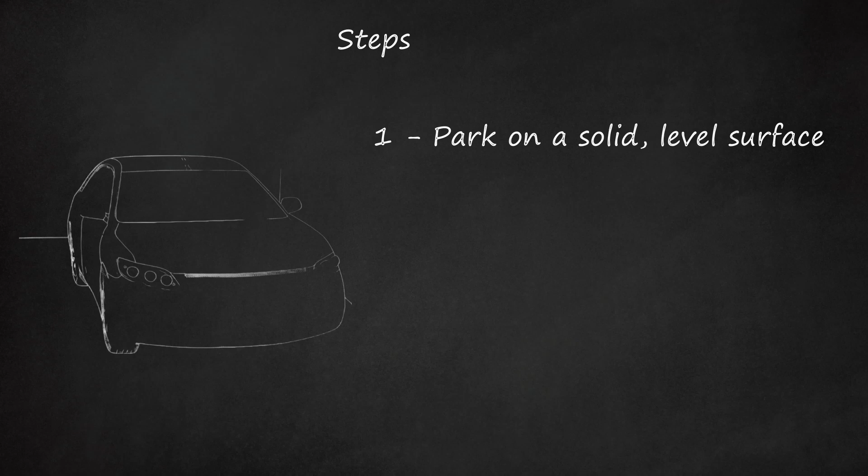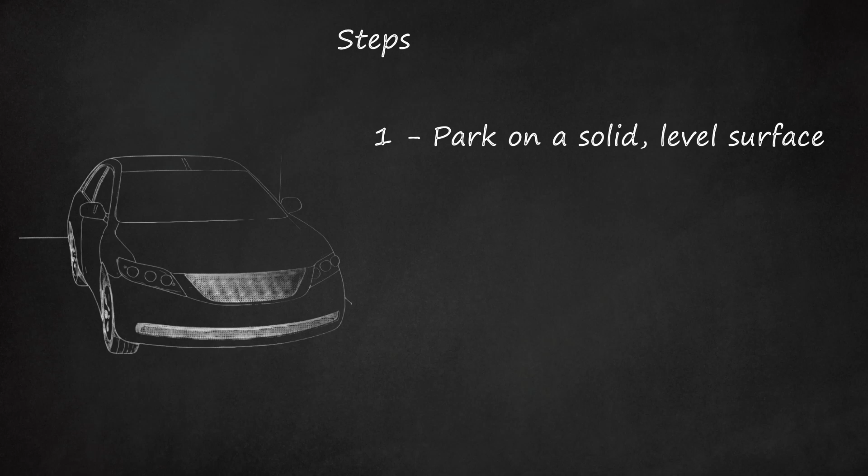1. Park on a solid, level surface. Concrete is best, as jacks and jack stands can sink into asphalt on hot summer days. This affects the stability of the vehicle and damages the asphalt surface. Work in a shady spot out of direct sun. It will probably take a few hours to do both sides of one axle if it is the first time doing this work, so plan accordingly.

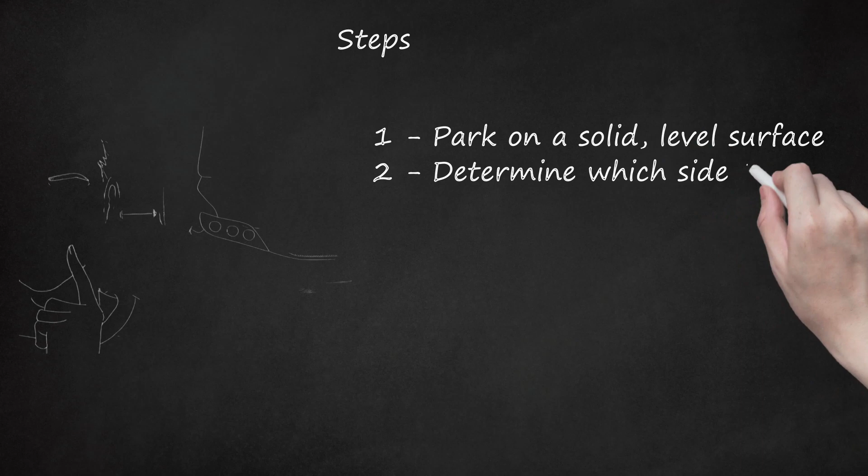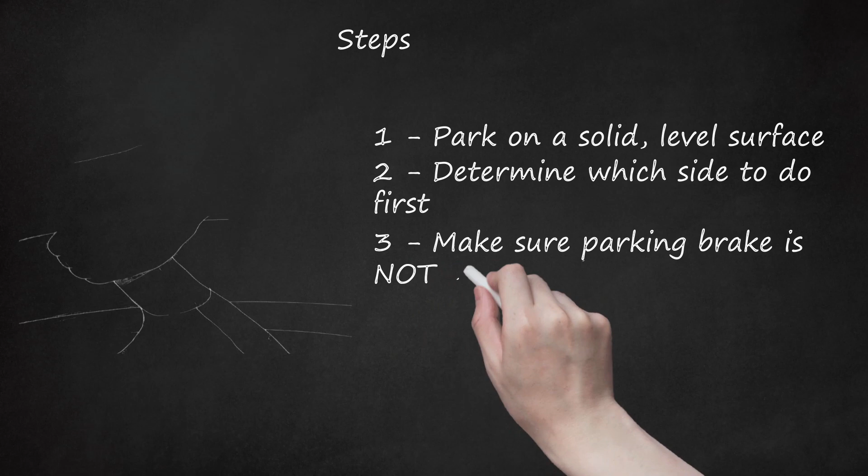2. Determine which side to do first. Assume the driver's side will be worked on first for this wiki. 3. Make sure parking brake is not engaged if working on the rear calipers. 4. Chock the wheels on the passenger side of the vehicle. Place one chock block ahead of the front tire and a second behind the rear tire to prevent the vehicle from rolling in either direction.

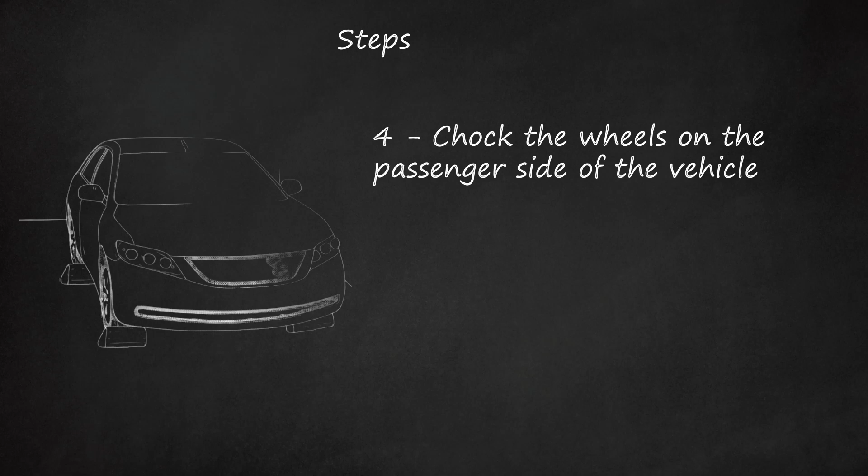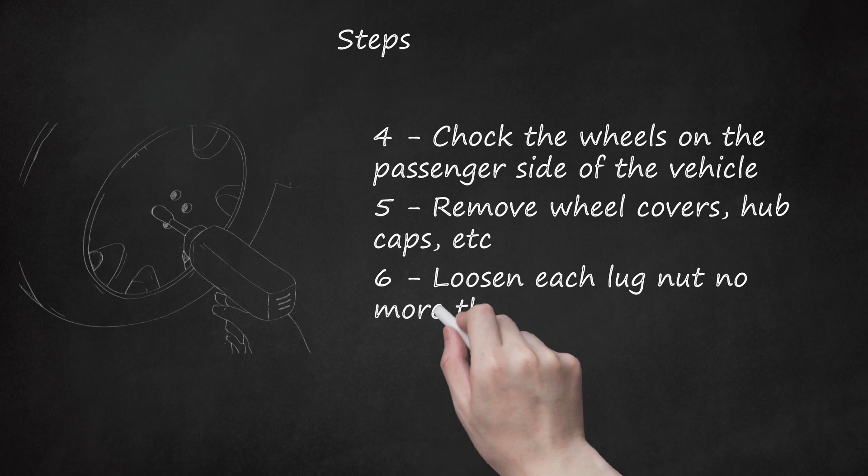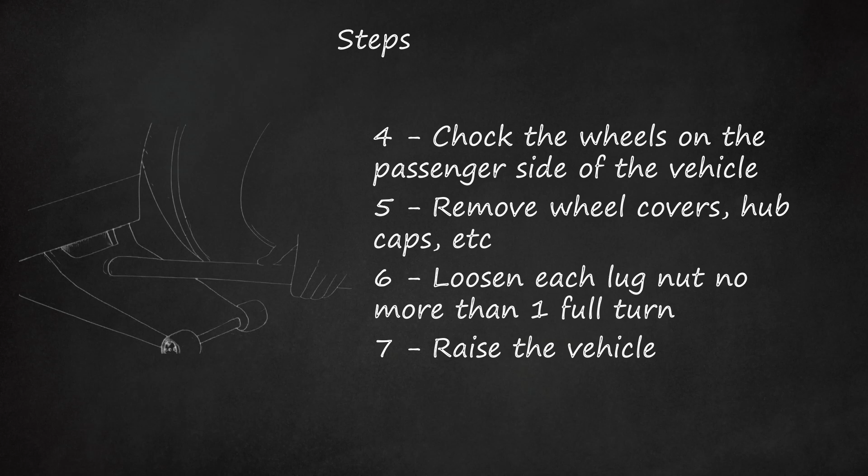5. Remove wheel covers, hubcaps, etc. to allow access to the lug nuts. 6. Loosen each lug nut no more than one full turn. 7. Raise the vehicle. Use the manufacturer's supplied jack or use a floor jack to raise the vehicle, and lift only at the manufacturer's designated points on the vehicle.

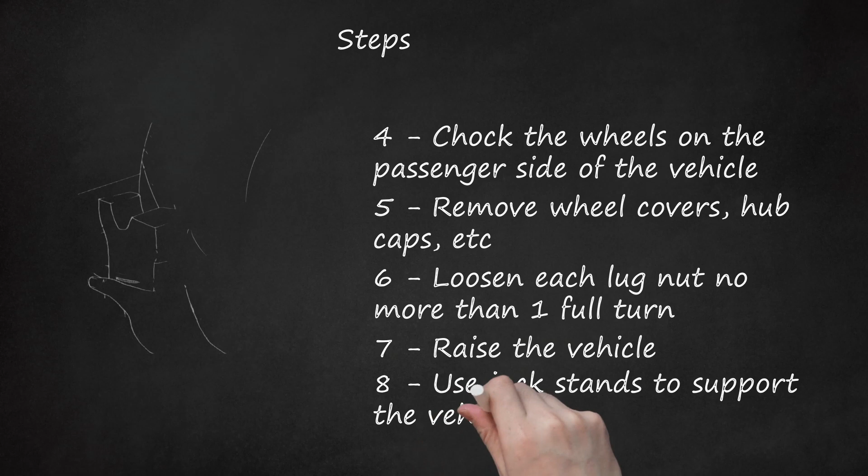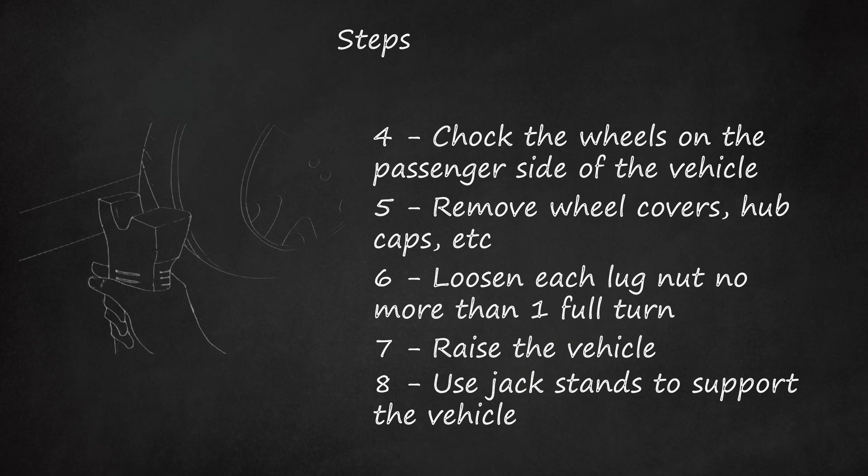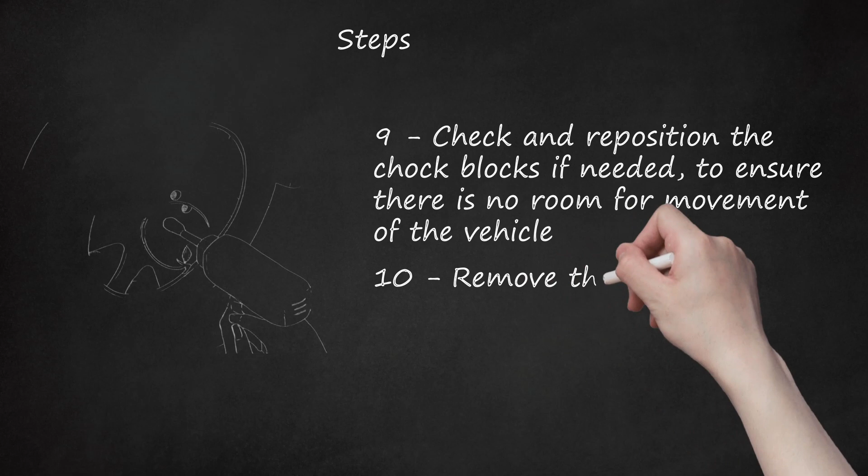8. Use jack stands to support the vehicle. Do not attempt to work on any vehicle supported only by a jack. If supporting the vehicle at the axle, do so closest to the wheels. Do not support or lift the axle solely at the differential. 9. Check and reposition the chock blocks if needed to ensure there is no room for movement of the vehicle. 10. Remove the lug nuts and place in hubcap. 11. Remove wheel and tire assembly.

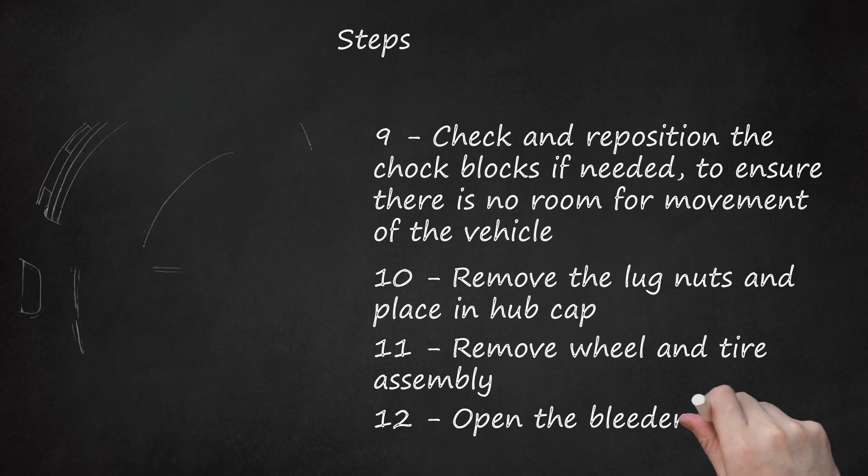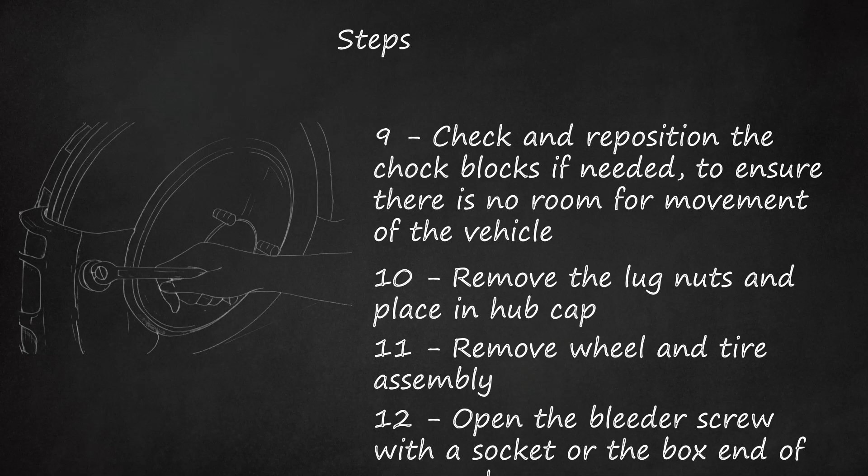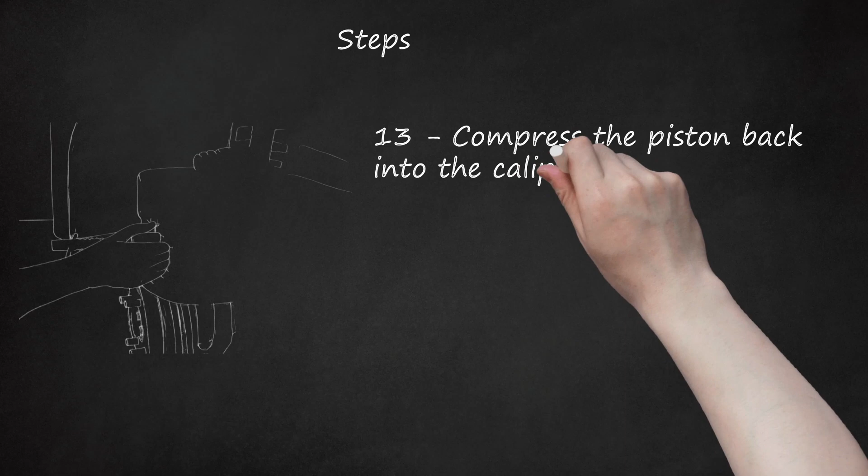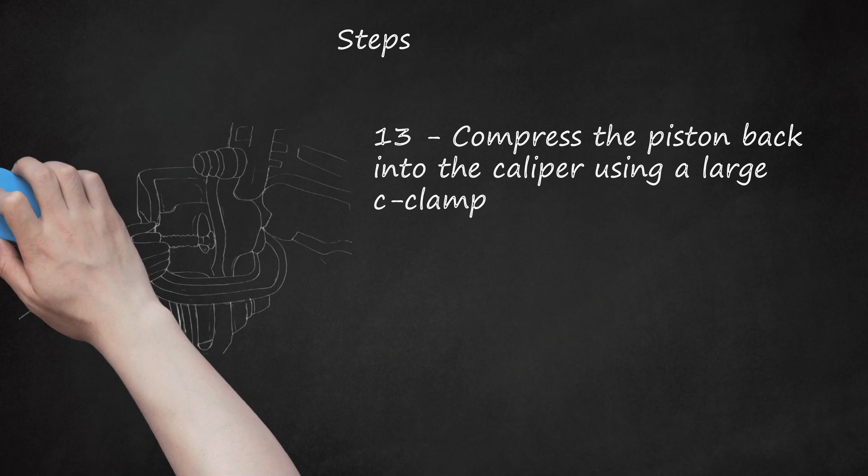12. Open the bleeder screw with a socket or the box end of a wrench. Note, these are made of soft metal and are easily damaged. Slip a length of snug-fitting clear hose over the screw to direct fluid into a container on the ground. 13. Compress the piston back into the caliper using a large C-clamp. Do this until the pads are no longer pressed firmly against the rotor. Expect brake fluid to be expelled from the bleeder screw as the piston is forced into the caliper.

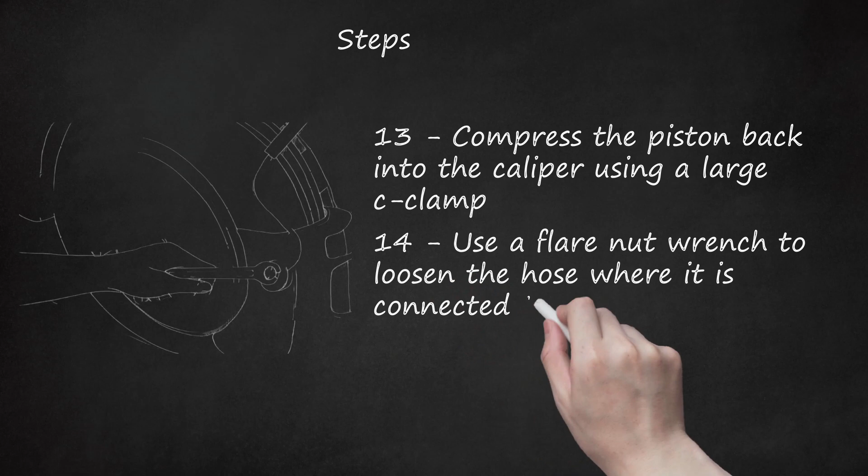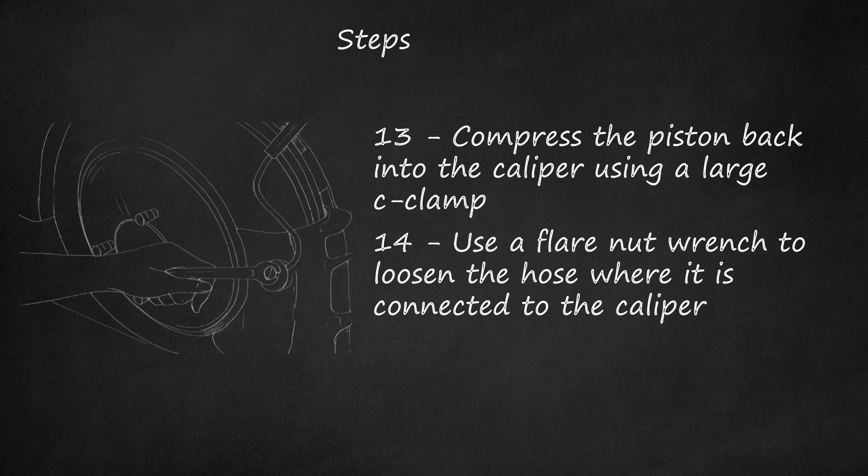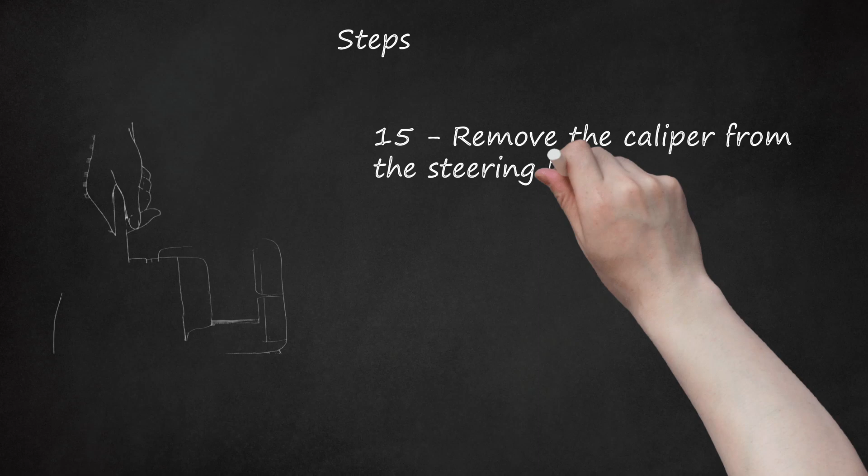14. Use a flare nut wrench to loosen the hose where it is connected to the caliper. Do not turn hose more than half a turn to avoid kinking the hose. On some vehicles a banjo bolt secures the hose to the caliper, in which case the hose can be removed in this step, and step 16 may be omitted. 15. Remove the caliper from the steering knuckle using wrenches or hex sockets as required. On rear disc brakes, the parking brake is removed from the caliper and the procedure varies from vehicle to vehicle. It will not be possible to remove the rear caliper if the parking brake is engaged.

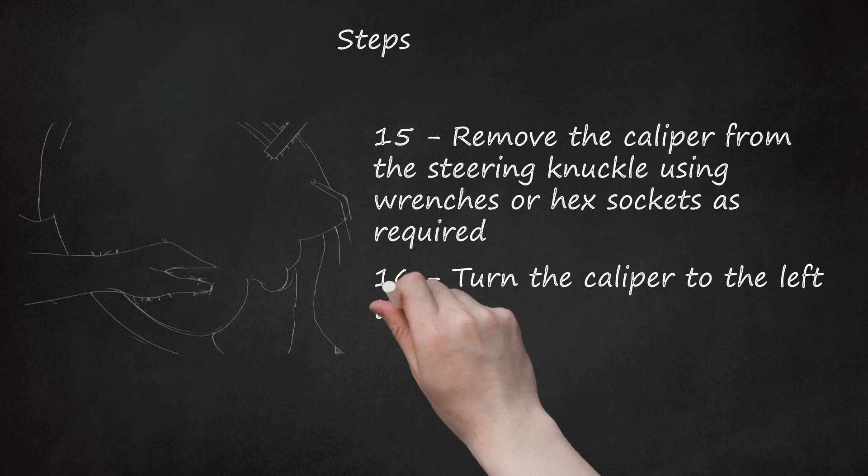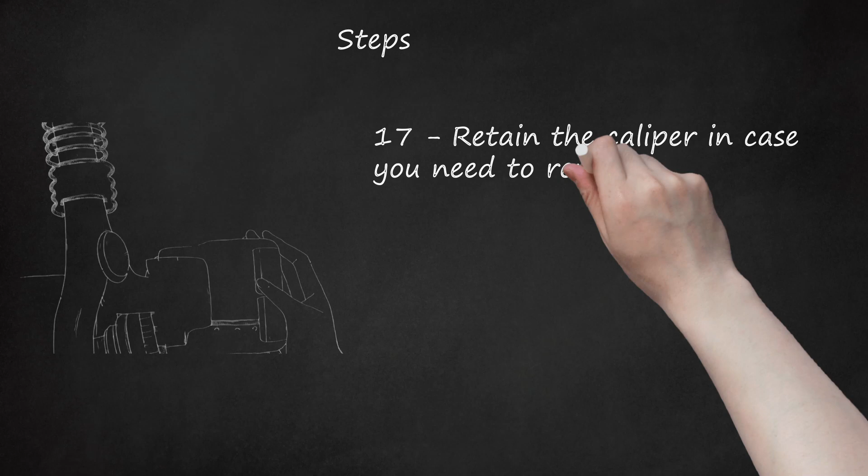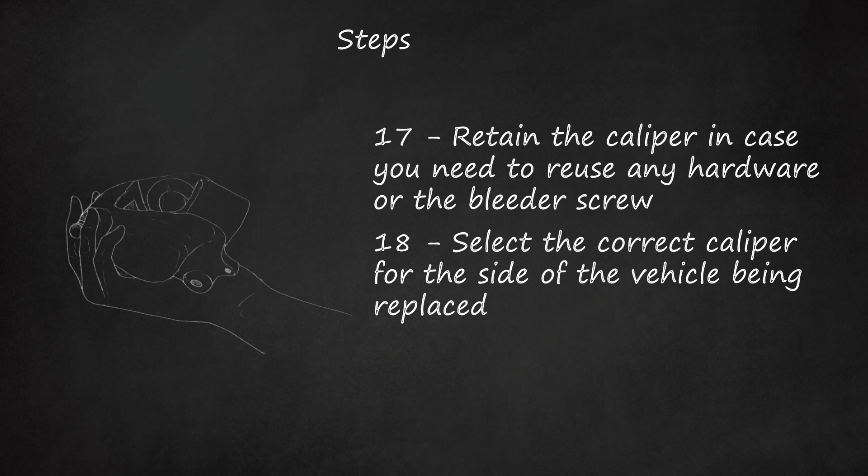16. Turn the caliper to the left to unscrew it from the brake hose after the caliper is free from the steering knuckle. 17. Retain the caliper in case you need to reuse any hardware or the bleeder screw. 18. Select the correct caliper for the side of the vehicle being replaced. The correct caliper will have the bleeder nut oriented at the top, or very close to the top, after being installed on the vehicle. Failure to install the correct caliper will trap air in the system. This will cause a spongy-feeling brake pedal and possibly brake failure. Hold both calipers near the rotor, oriented as they would be installed on the vehicle, and install only the caliper that has the bleeder nut at the top.

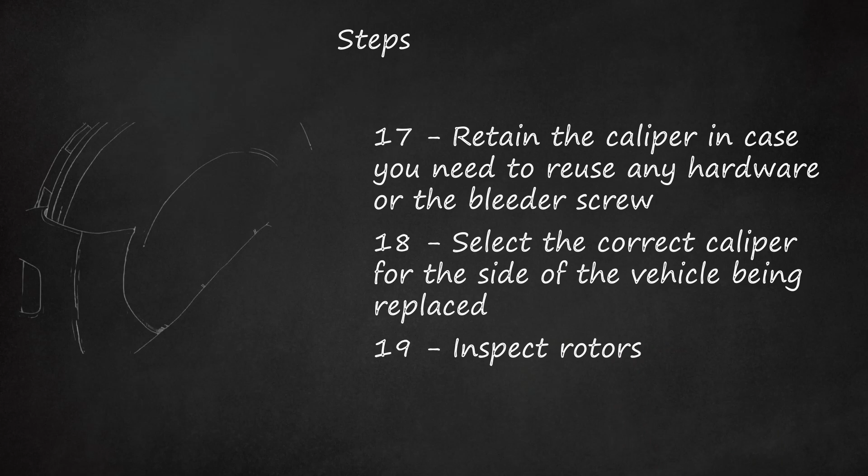19. Inspect rotors. The bulk of this brake work is the caliper and pad removal and replacement. Not servicing the rotors, while accessible now, is practically negligent. Consider removing the rotor for machining, called turning on a lathe, to remove glazing, gouges, and grooves. Well-traveled rotors are often glazed and result in extended stopping distances.

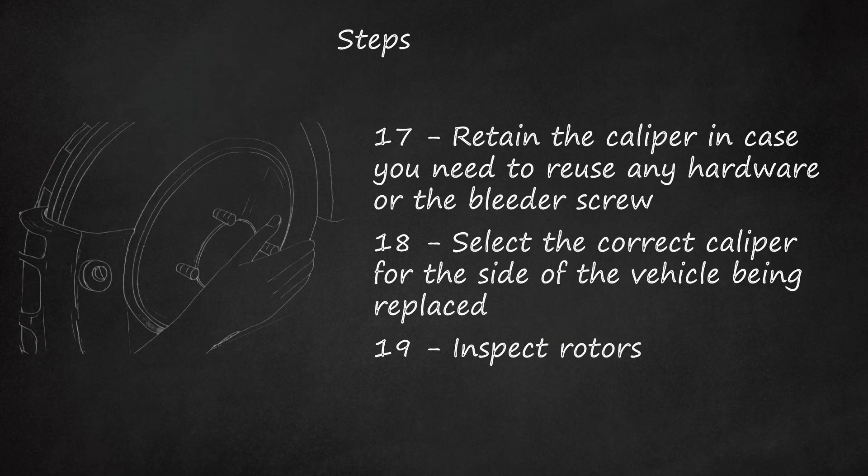If the rotor is too worn or has deep grooves or has significant rust, replacement may be required. Oftentimes replacing with new rotors for $25 or so is better than machining old rotors for $15. Actual cost of machining or replacement rotors is dependent on vehicle type, supply house pricing, etc., and is a matter of personal choice. Many full-service auto supply shops offer rotor machining. It is illegal, however, to machine rotors that are too thin or otherwise unsafe for installation on the vehicle.

20. Fully compress the piston and install the new brake pads into the caliper. This step is not needed if a C-clamp was used during caliper removal. 21. Attach the brake hose to the caliper, making sure to use the new copper washers that came with the new caliper, and fit the assembly over the rotor.

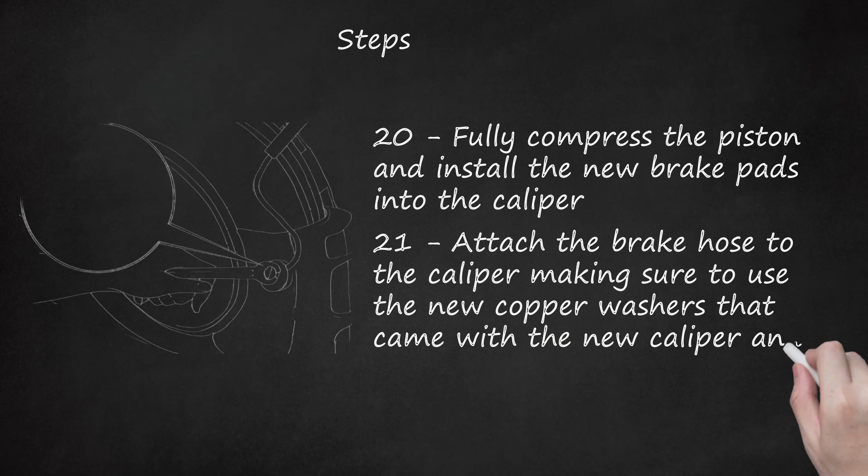22. Secure the caliper to the steering knuckle in reverse order of the removal steps above. 23. Finish tightening the hose to the caliper if not done already, being careful not to over-tighten it. 24. Install the bleeder screw loosely. Slip clear hose over the screw to direct fluid into a container on the ground. Release the hose clamping pliers or vice grips.

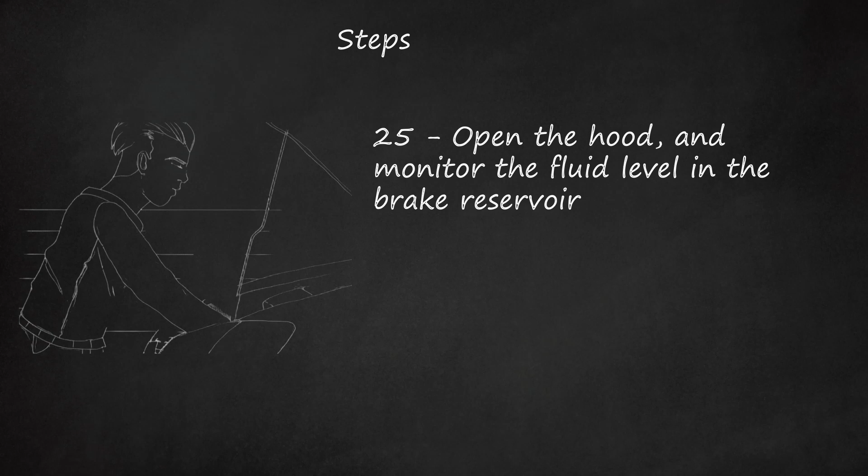25. Open the hood and monitor the fluid level in the brake reservoir. Add additional fluid to maintain the level above minimum. 26. Have a helper compress the brake pedal and hold it to the floor. Tighten bleeder. Have helper pump brakes 3 times and hold. Release bleeder valve to drain air and tighten. Repeat process until no air is found.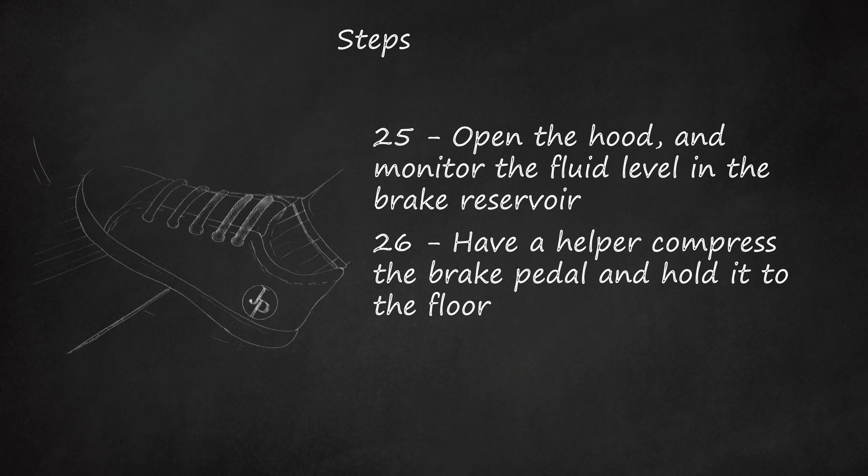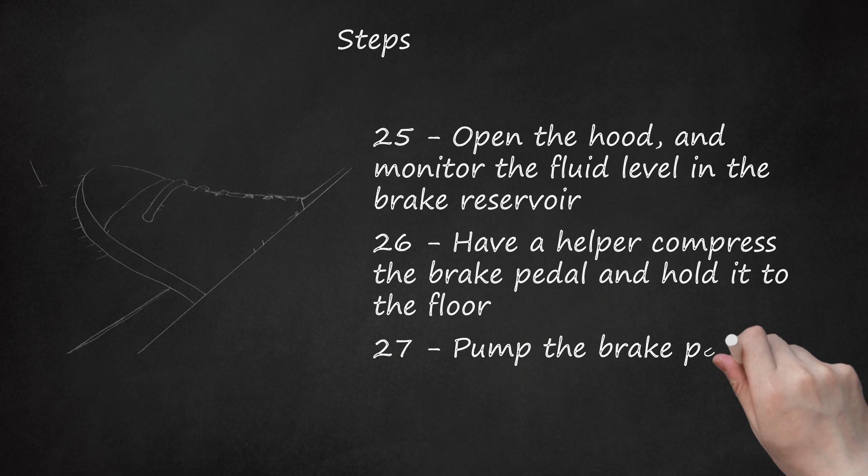Monitor the brake bleeder screw hose and close the screw when a steady stream of fluid with no bubbles comes out. Remove the hose and container. 27. Pump the brake pedal with the engine off until a solid feel is obtained. 28. Reinstall the wheel and tire. While pressing the wheel firmly and evenly against the rotor, spin the lug nuts onto the studs snug tight. It is not required to have the lug nuts fully tight at this point. The next step will complete this process.

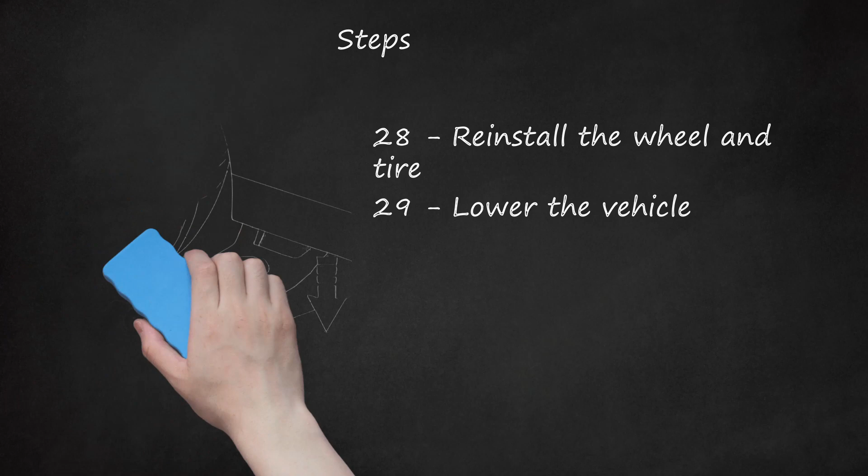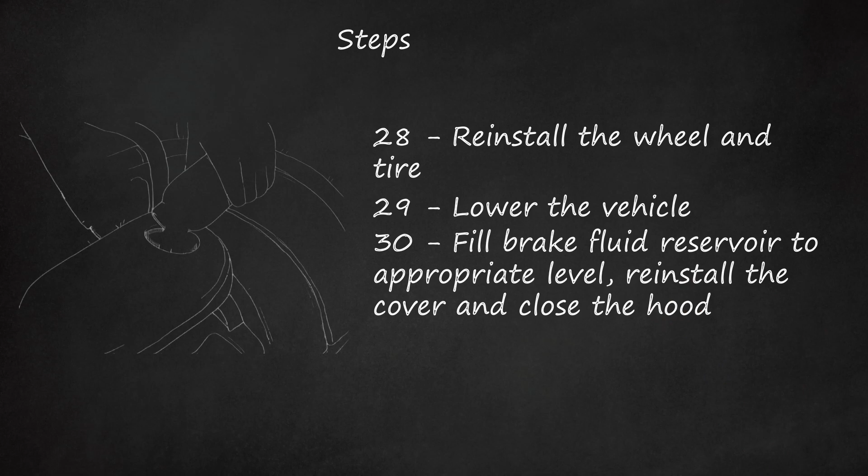29. Lower the vehicle. Fully tighten lug nuts to appropriate torque specifications with the tire in contact with the ground. Tighten lug nuts in a star pattern. Do not tighten adjacent lug nuts in a circular, one after the other pattern. 30. Fill brake fluid reservoir to appropriate level, reinstall the cover and close the hood. Remove any spilled fluid from painted surfaces quickly, as the finish can be damaged if allowed to sit for even a short time.

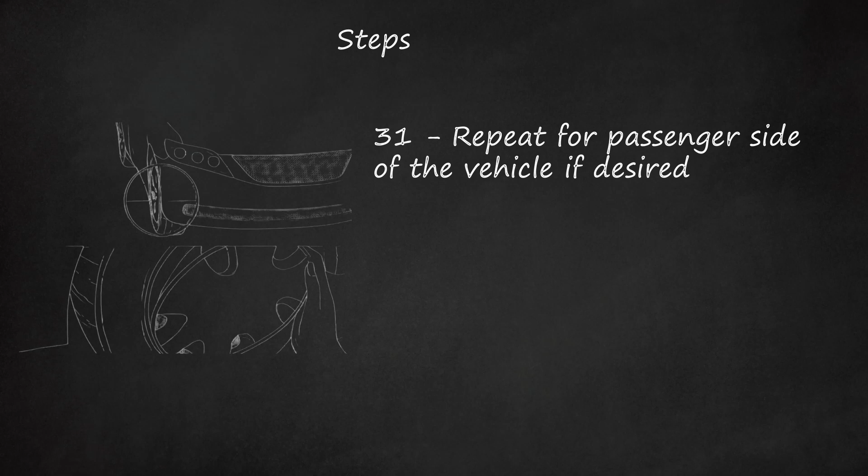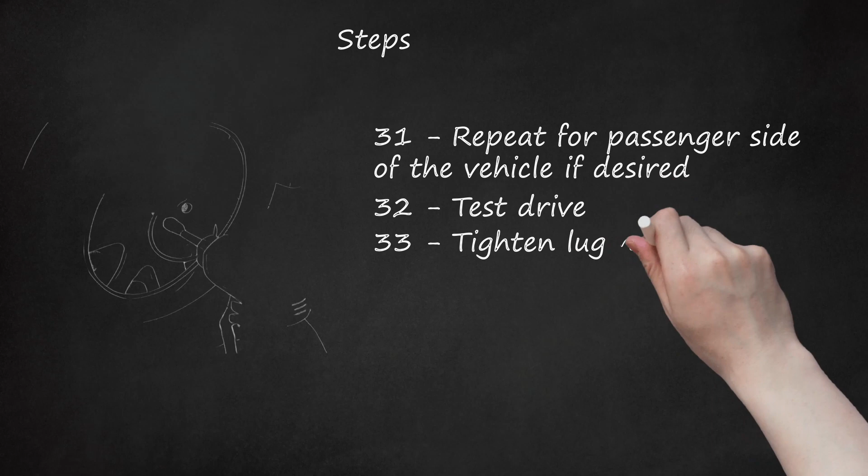31. Repeat for passenger side of the vehicle if desired. 32. Test drive. Perform brake testing at low speeds away from people and buildings if at all possible. Gradually increase speed for testing. 33. Tighten lug nuts and secure wheel cover, hubcap, etc. Tips. If a steady stream of fluid cannot be obtained from the bleeder screw, you must manually bleed the brakes.

Different grades of pads, semi-metallic, ceramic, etc., may be available for your vehicle. This is the reason for wide variations of price. When comparing prices between different suppliers, make sure each is quoting the same material of pad. Generally stay away from the lowest grade unless preparing the vehicle for sale, as they wear much quicker. Mid-grades and up are best choices for vehicles that are intended to be kept for some time or accumulate a significant amount of highway miles.

Only freshly opened brake fluid should be used. Old brake fluid may absorb ambient moisture and when put inside your car's braking system will corrode metal parts. The brake job described above, pad and caliper replacement only, will not solve a pulsating brake pedal problem. Pulsations of the pedal felt when braking are indicative of a warped rotor. A warped rotor must be either replaced or machined on a lathe to make it true again.

Consider brake work as a per-axle job rather than a per-wheel job. The brakes at one wheel have been subjected to identical conditions of service, wear, etc. as the other. Barring any odd circumstance of manufacturing defect, the brake components at each wheel of the same axle can be expected to be found in the same condition. If one has failed or is failing, the other is most likely failing as well. Front brakes provide about 70% of the stopping power for most vehicles. This means that the second time the front brakes will need to be redone, the rear will probably be ready to be serviced, too.